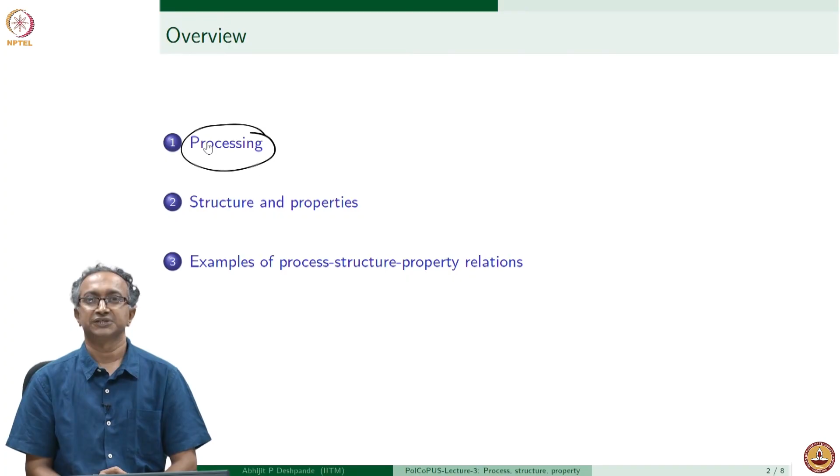The focus in this lecture will be on concepts. We will do this by looking at what is processing in the context of polymers. What do we mean when we say we are processing the polymers? What do we mean by structure of these polymers and properties, and more importantly, how are they interrelated? So we look at some examples of process-structure-property relations in these polymers.

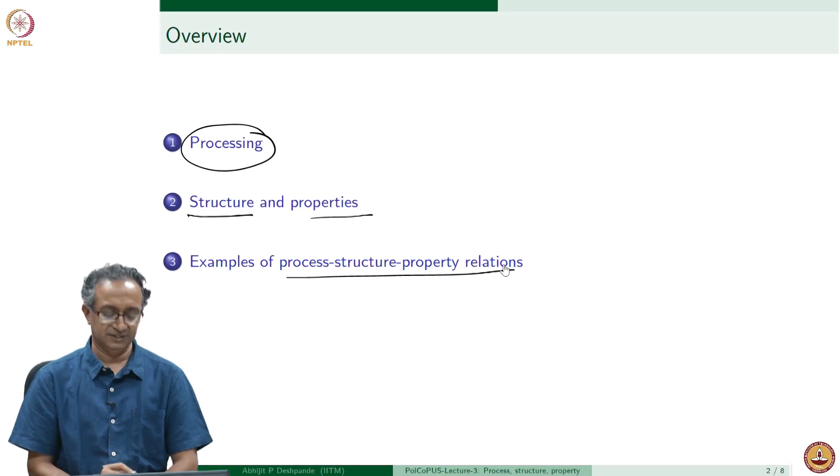Let's first begin by trying to understand what do we mean by polymers and what is the diversity of materials that are actually there when we talk in terms of polymeric materials. We can process the polymer by itself, or we can have the polymer made up of different monomers, when it's called a copolymer. We could mix polymers and make them into a blend. We could also mix the polymer along with another filler, a fiber or a particle, in which case it's called a composite. We could also have a polymer membrane, for example, for water purification.

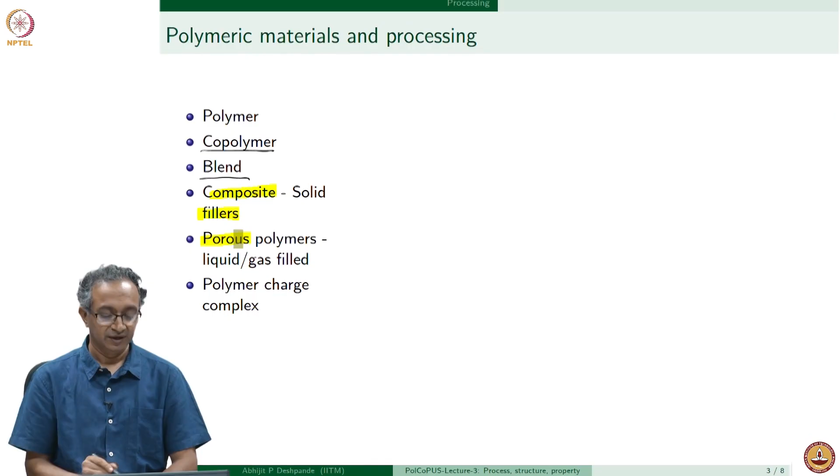We know that many of the RO units which are there in our homes, or whenever we talk of purification of water, membranes are used, and quite often many of these membranes will be porous, in which case they are either filled with liquid or gas. Can you think of an example of a gas-filled polymer? Styrofoam, of course, right? You can see that it's a very light foam material where polymer and gas is together.

And then we could also have a polymer along with some charges, in which case it's a complex of polymer and charge. So when we say polymeric materials, there is a variety of materials, diversity of materials that are out there that have to be considered. Sometimes polymer by itself is there, but quite often it is mixed with other polymers or other sets of substances.

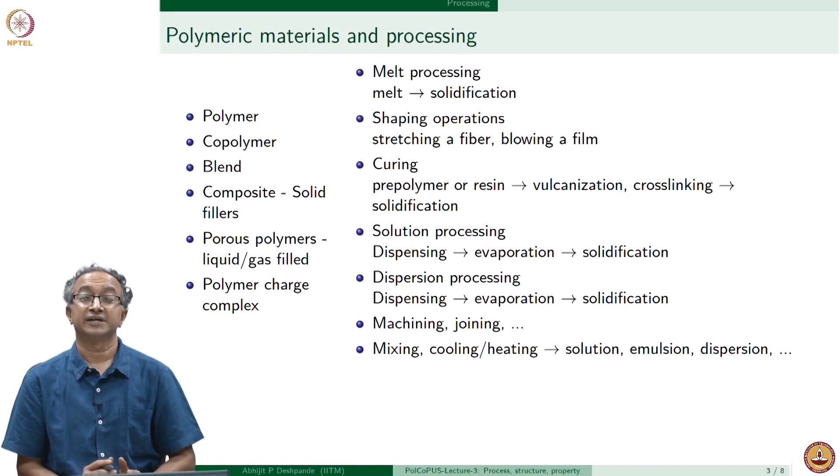So now what do we mean by processing of these polymers? We could have a variety of ways in which polymers can be processed. For example, we can melt the polymers, which means we increase the temperature. So one aspect we can look at is where we can melt the polymers, and by which we mean we increase the temperature, make them more fluid so that they can flow, and then mold them and so on.

So what we have is melt of a polymer and then it will solidify. This is one aspect of processing - that is how a complex shape can be made. If you want to make a disc-like object, initially we start with granules, we melt it and then make it into disc shape by making it flow into a disc shape mold.

Once we get a shape, we might have to manipulate the shape further. For example, we start with granules, we extrude a wire or a fiber, and then we may want to make it thinner. Or we extrude a sheet and we may want to make it into a very thin film. So in that case, we have what are called shaping operations.

An important class of polymers, we start with what is called a pre-polymer or a resin, in which case the polymer is only an oligomer, or small molecular weight, small molar mass molecules. And then when we are actually processing and shaping it, curing happens or reactions happen. So in this case, solidification happens because there is reactions happening in the material.

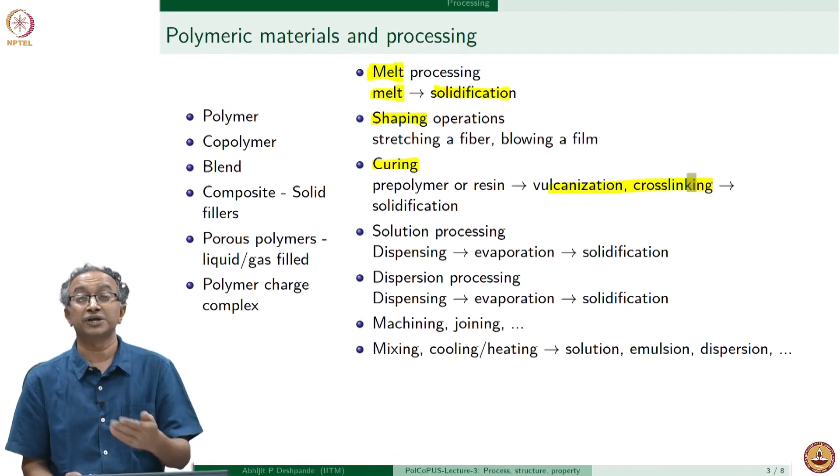There's alternate ways of processing polymers also. For example, if we are using in food applications and we want viscosity to be higher, like a jelly, in that case we may be using what is called solution processing. So quite often, let's say in a coating operation also, we want a polymer coating as a protective coating.

Then we will form a solution and dispense it on the substrate we are coating, then allow the solvent to evaporate, and the solid coating will form. So again, this is an example of a processing operation.

We need not have a solution of polymer where there is intermolecular mixing. We could have just polymer particles, like in case of paint, where we have particles of polymer and particles of pigment, usually an inorganic oxide, in a solvent. This is called dispersion.

When engineering these materials, we may have to cut or shape them, give them a particular shape, join them, welding may have to be done, or fastening may have to be done. So many of these machining operations are also required as part of processing.

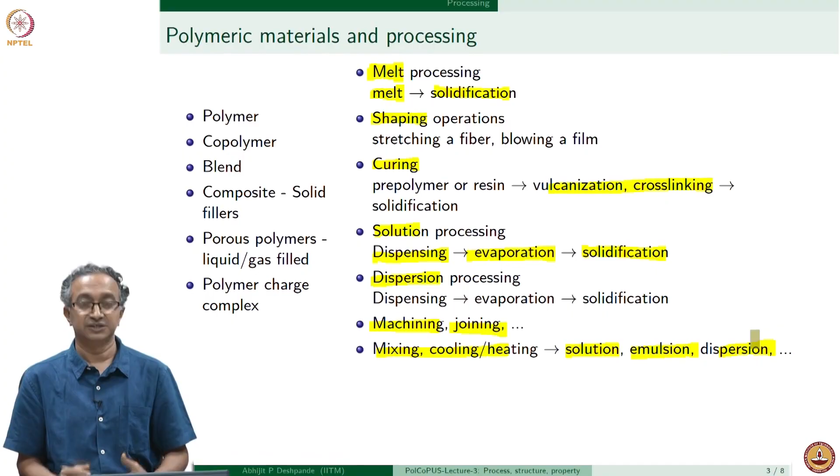Another aspect is that to make solution, emulsion or dispersion, we will have to do mixing, cooling and heating. So when we say we are processing polymers, we are basically trying to fabricate objects out of these polymers, and as part of the fabrication process we have flow, heating, cooling, mixing, and application of stresses and other applied fields, so that we get the requisite shape at the end. This is called processing of polymers.

What about structure and properties? In case of polymers, there are two sets of states which are most important. One important feature to notice is that I am not calling them liquid and solid, I am calling them liquid-like and solid-like.

This is something we will continuously learn during the course: solid polymers will have some liquid-like features, and a melt of a polymer or a solution of a polymer will have some solid-like features. So rather than calling them solid and liquid, we will say they are more solid-like and more liquid-like.

A liquid-like state, which could be a solution or a melt or even a rubber, has many features of liquid-like phenomena, because polymer molecules are dynamic objects in these situations, meaning the polymer molecule can move around. If you think of a bowl of noodles, the noodles are moving around, and that's like a liquid-like state of polymer.

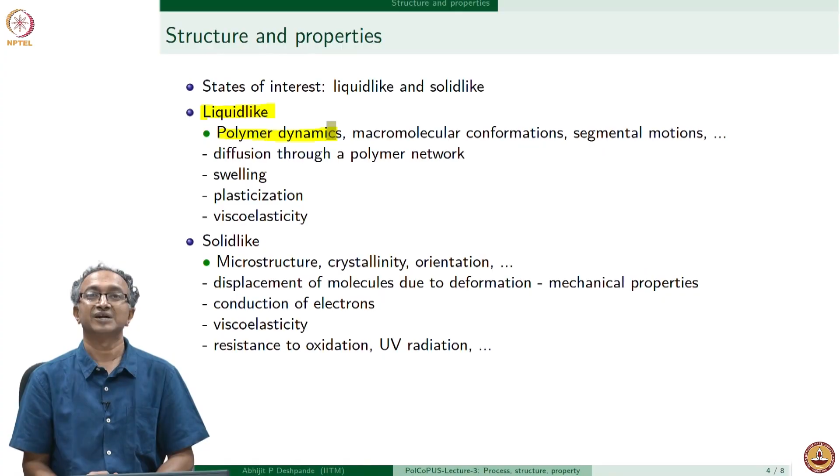So the macromolecules or segments can move about. There is segmental motion possible, or macromolecules can change conformations. And when are these important?

For example, when looking at diffusion of a small molecule through a polymer, how the small molecule diffuses around these macromolecules, which are also moving about, is an important consideration. Or, in a diaper which is supposed to absorb, how much can it absorb, how much can it swell? That is determined based on the dynamics of the polymer, how flexible it is, and so on.

Similarly, when I make an object out of PVC, polyvinyl chloride, I can only make objects out of PVC when I plasticize it. I can add something to plasticize it, or heat something to plasticize it. Whenever I plasticize something, I make segmental motion possible, macromolecular conformations possible. These are liquid-like features which we will have to understand.

Of course, I have already highlighted that when it's liquid-like, it will certainly have some solid-like characteristics also. So viscoelasticity: viscous means liquid-like, elastic means solid-like. The key feature associated with viscoelasticity of polymers will be polymer dynamics, which gives it the liquid-like character.

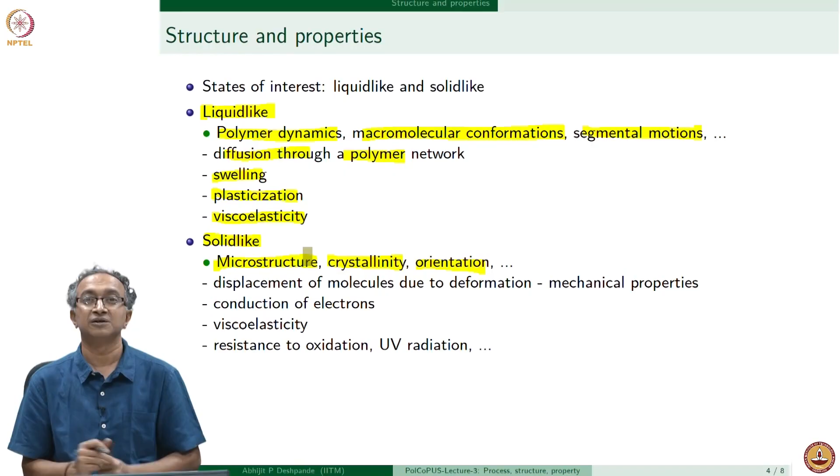On the other hand, if we look at solid-like materials, we need to know whether it's crystalline or amorphous, what is the orientation of macromolecules, how molecules are arranged with respect to each other, or if we have a fiber in a polymer, how the fiber is arranged within the polymer matrix, and so on. This is called the microstructure of the material, and it's also an aspect of structure of these materials.

The properties of interest due to the structure are, for example, the deformation of a polymer material. If it's more crystalline or less crystalline, it will be easier or more difficult to displace molecules. So mechanical properties will depend on the microstructure and how crystalline the material is. Another example is conductivity, and in this course we will also learn about conducting polymers.

Whether crystallinity will enhance conductivity or whether amorphous material will enhance conductivity, we will see structure is again closely linked with property of these materials. In the solid state, though molecules seem to be frozen and therefore we get a solid-like character, there is some liquid-like motion possible over long term or at high temperatures. Therefore solid-like materials will be viscoelastic, meaning predominantly solid-like with lot of elasticity features but with some viscous features also.

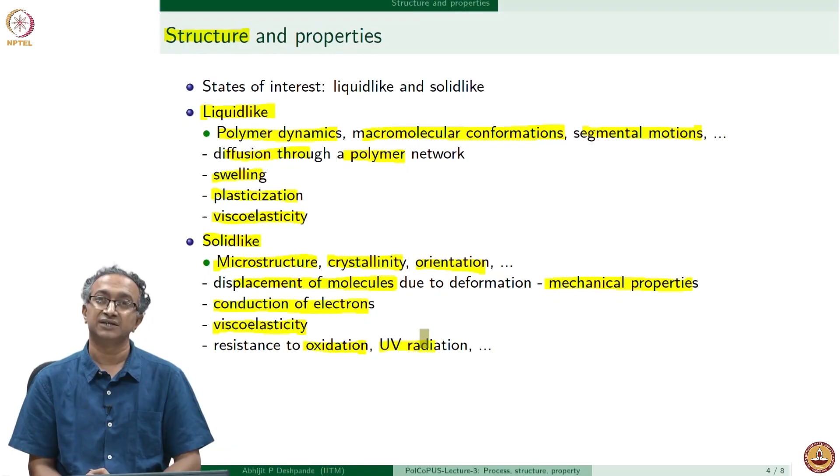And of course in solid state we also have to worry about, for example, can oxygen come in, is it resistant to UV radiation, are chemical reactions happening in the solid state, because this will determine the overall performance of the polymer. So in a nutshell, we have seen what is meant by processing of polymers, what is its structure and what are the properties.

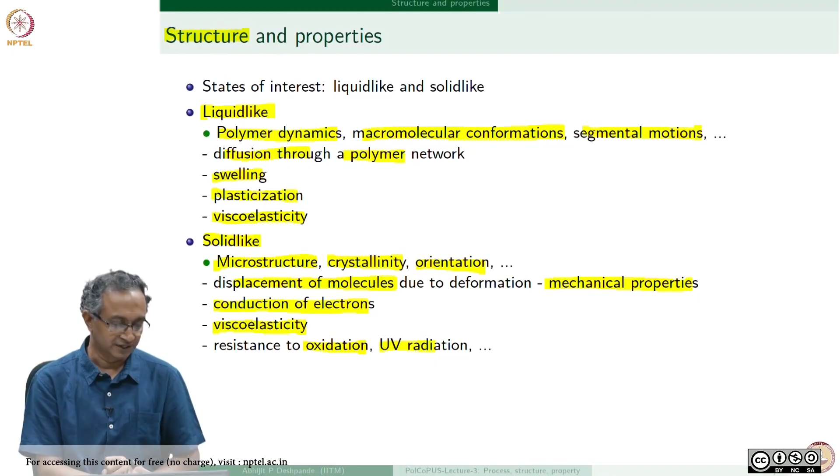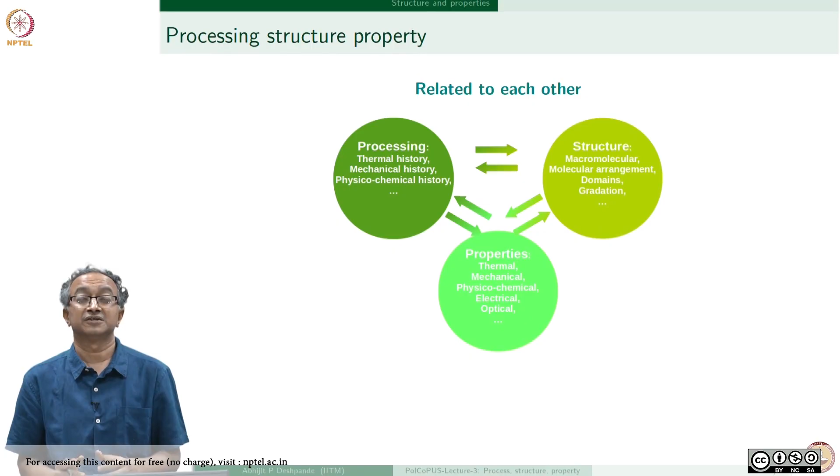Now all of these are interrelated to each other. This is generally called a process structure property triangle of the polymers. This is not unique to polymers, by the way. Most material scientists would talk of process structure property relations in materials, because the way you process them will determine their structure and properties, or depending on the structure, processing and properties will be determined, or properties will determine what process and what structure do they have. So it's basically interrelations between all of these.

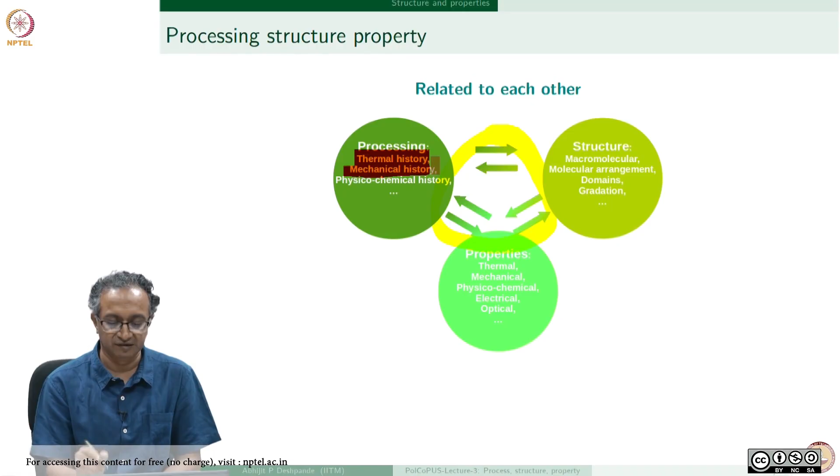When we say processing, we talk about what was it heated to, what was it cooled to, what was the thermal history of the material. When we talk about processing, because we stretch the material, we make it flow, and when we process it, it could be along with a plasticizer, it could be along with a solvent. So there is always a physico-chemical, mechanical and thermal history associated with processing, and two different processing operations will lead to two different sets of structures and therefore different sets of properties.

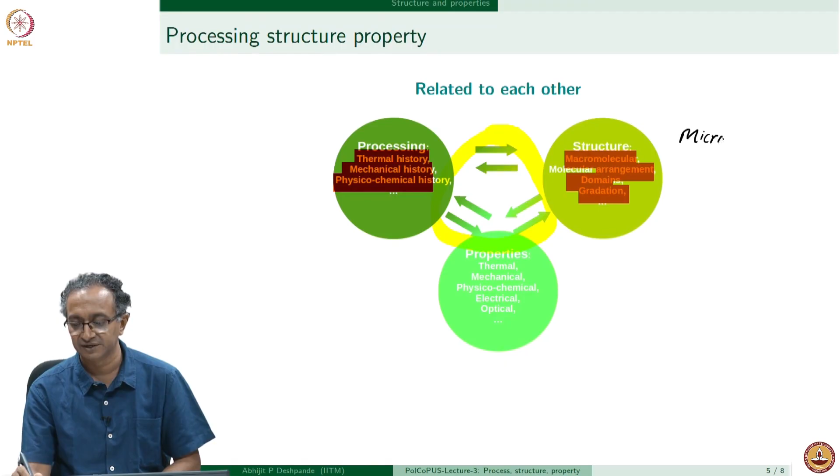When we say structure, we look at the molecular structure in terms of arrangement of molecules, in terms of domains, whether it's crystalline domain or amorphous domain, or maybe one particular polymer mixed in another polymer, and also whether there is gradation in terms of compositional difference. One part of the component may have lot more fiber compared to the other part, so there is a gradation in terms of structure. One part of a component may be more crystalline compared to the other part. That's why it's called microstructure - we many times refer to not just structure but microstructure, because we are interested in microscopic details of the structure.

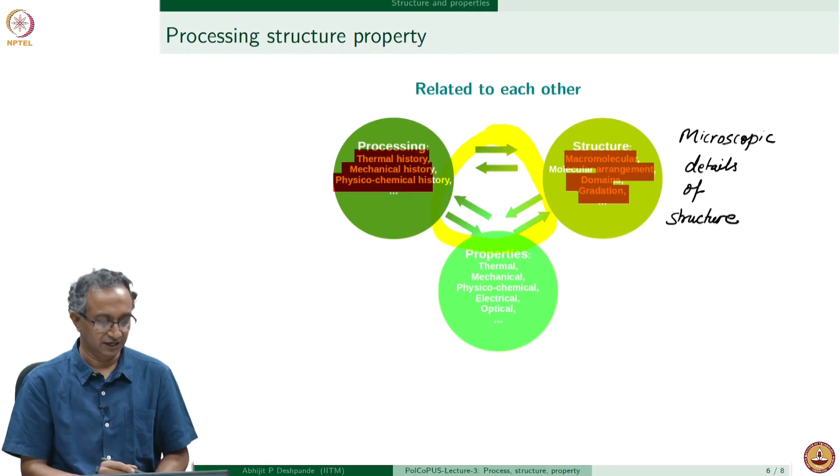And when we think of properties, we think of all different properties: thermal conductivity, mechanical modulus of the material, conductivity, refractive index, and so on. So in the beginning, we looked at what is meant by process structure properties. Now we will close this lecture by looking at a few examples of each of these as to how processing, structure, and property are related in case of polymeric materials. So let's start with processing and structure relationships.

The first example that I'm going to give is biaxially oriented polypropylene, BOPP. If you search this term, you will see that lots of suppliers are there in each and every country which supply BOPP films, and it's different compared to polypropylene. The reason is that this film is processed in a particular way. What we mean by biaxial stretching is, if I get a film, I stretch it in two perpendicular directions.

And how is this different compared to, let's say, HDPE, where you have a largely linear polymer with very small branches at most, entangled with other sets of macromolecules. You can clearly see that how a molecule can move about will be very different, because entanglement and these branch points will make very different motion in branched polymers as opposed to linear polymers.

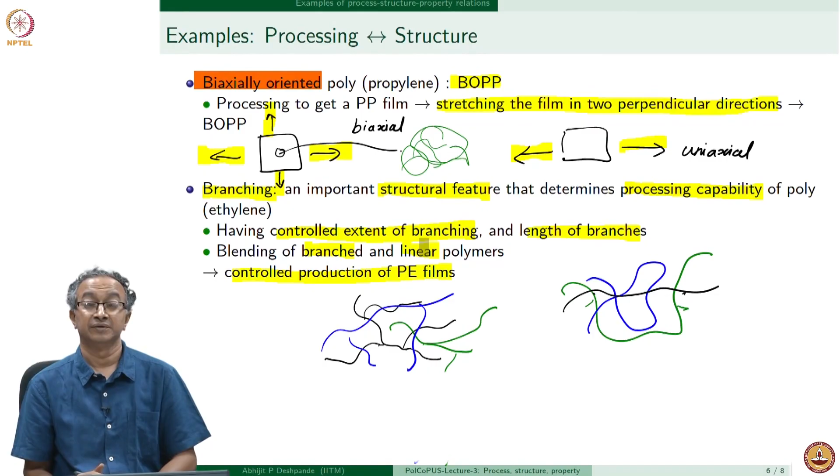And so, for a controlled production of polyethylene films, many times blending of branched and linear polymer is done. This is such a popular case of improving processing of materials that polylactic acid, which we will learn, is

a very promising biodegradable polymer for many packaging applications. But it's very difficult to process polylactic acid. So one of the key research and practical questions people are asking is, can we use branching to improve polylactic acid processing? Polylactic acid generally will be a linear molecule, so can I make it branched? Or can I mix some other branched molecule into it so that I can make film very easily, like I can make films with polyethylene?

Another aspect that we will continue to learn throughout this course is related to polylactic acid: in which way is it biodegradable? What makes polylactic acid biodegradable and polyethylene not biodegradable? Also, why is polylactic acid important? Because we are using a renewable resource with it. So in the next set of lectures during the course, we will also learn about these aspects.

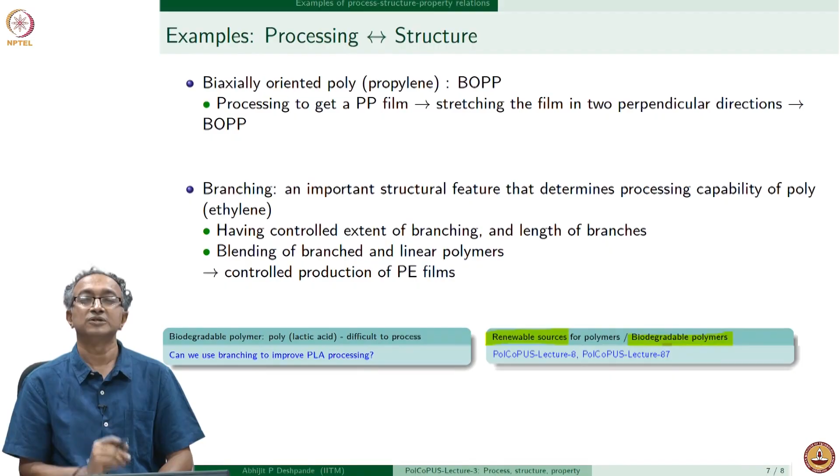Now let's continue and look at other examples of processing and property. For example, when we are doing welding, molding of plastic objects, we will have flow. So when we do plastic molding, there will be flow and melt flows. For example, if we are making a cylinder with a hole in it, basically an annular kind of object.

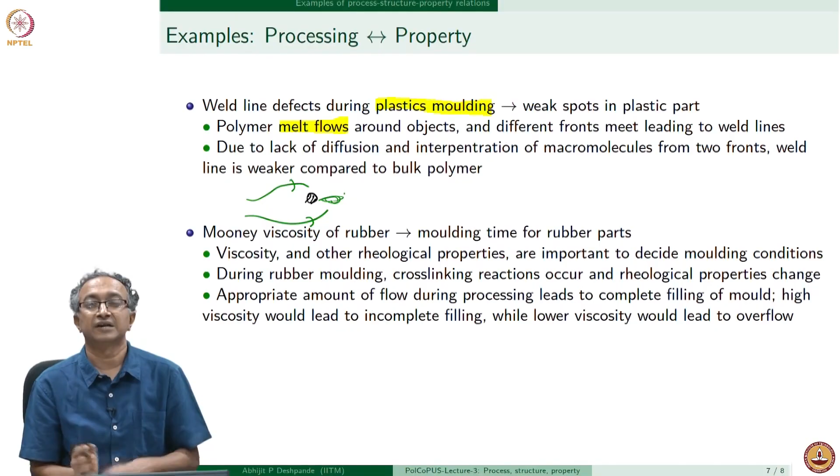What will happen is we will have a solid block around which polymer will flow. So polymer melt will flow like this, it will flow like this. And the polymer in this region, the polymer melt will come and flow and again join together. That's called a weld line of a mold. So the weld line is going to be the weak spot, because two polymer melt fronts have to come and meet, and then macromolecules have to start entangling.

But depending on the diffusion rate and depending on the temperature and pressure of our molding operation, this interpenetration may not be sufficient. So in the end, when we get a plastic object, everywhere else the properties will be very strong, but here, since the polymers haven't got enough chance to intermingle and interpenetrate, there will be a weak spot. So this is a case where processing is leading to a property issue in terms of weak spots.

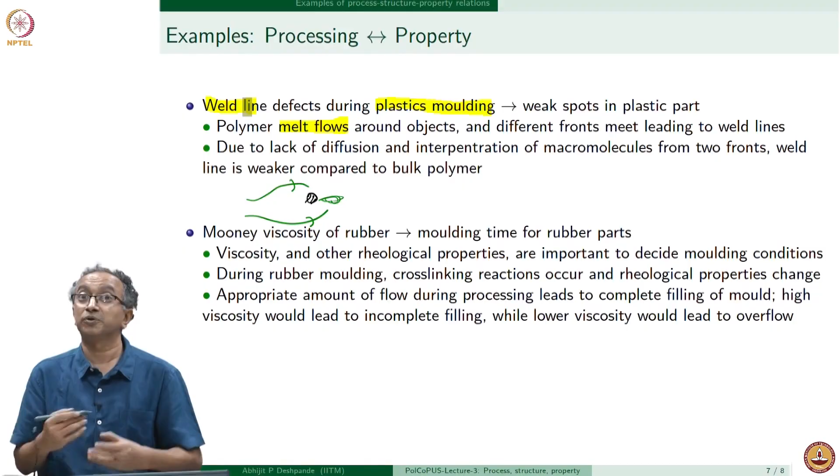And that's where the part is likely to fail. So we need to know where the weld lines are, and can we reduce the disadvantages of weld lines, can we improve properties around weld lines? So processing directly influences the performance of a part.

We can also look at another example where Mooney viscosity of rubber is important in terms of finding out how we will process it. For example, how much time will the molding operation take?

Because starting viscosity will determine how the material is flowing and being shaped inside a mold. And more importantly, in case of rubber, as the molding is going on, cross-linking happens and viscosity changes as a function of time. Rheological properties, which are nothing but flow behavior properties of rubber, keep on changing.

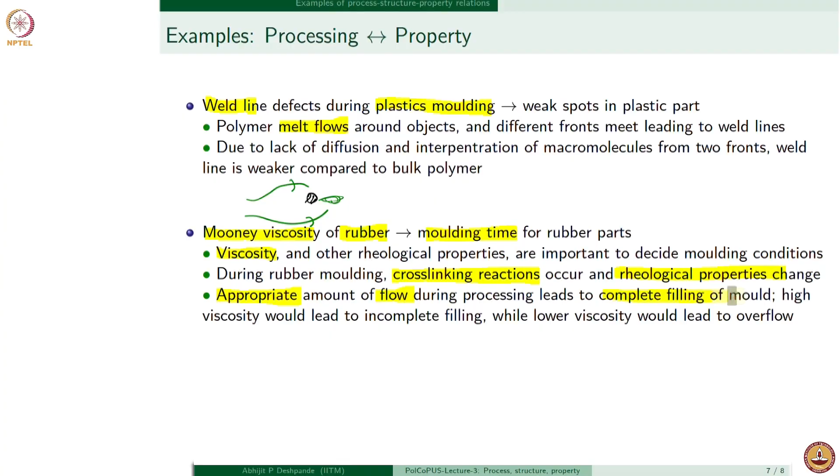So we have to ensure appropriate amount of flow during processing so that we have complete filling of the mold, which implies we should not have incomplete filling, or too much overflow. This can be ensured if we understand the viscosity of the material properly. So in this case, the property of the material influences the processing conditions.

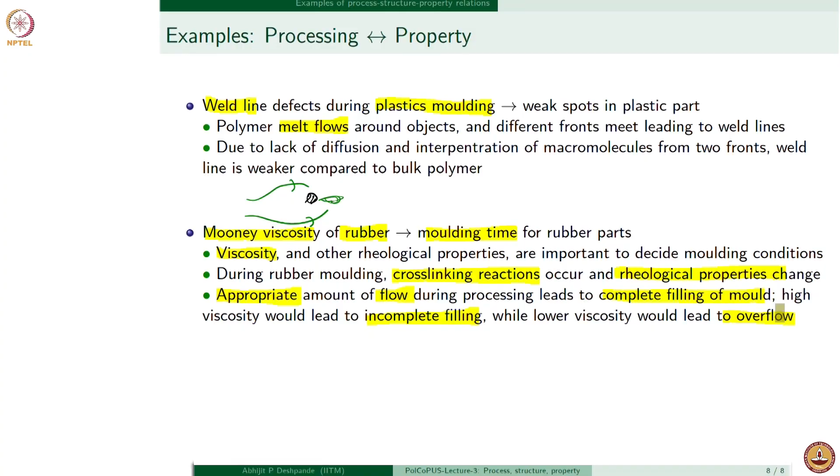So it's a very complex material, and the conductivity depends very strongly on the structure of the material, and in fact the microscopic arrangement in the material. How is the crystalline arrangement of PEDOT, which is one polymer of this overall polymeric material, and how are the domains of PEDOT and PSS distributed with respect to each other?

So you can see how the structure of the material determines its property, in this case electrical conductivity. This gives a very rich possibility from an application, scientist, and engineer point of view. Can I manipulate my structure in a way to give maximum property? So I need to understand the relation between the microstructure and the property, in this case electrical conductivity.

The last example we will look at is where a property, in this case glass transition temperature, influences the structure, in this case molecular rearrangements in the material. So a polymeric material, let's say a PET bottle, if we keep it at room temperature for 25 years, at room temperature meaning around 25, 30, 35 degrees Celsius, it will be fine.

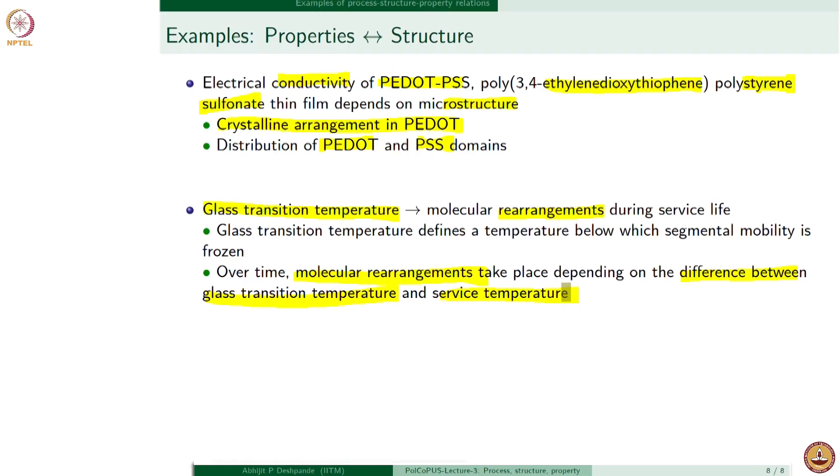So through this, we have seen the possibility of important correlations between processing, structure, and properties in these polymeric materials. Just to remind you, conducting polymers we will look at in a separate lecture, where we will see if it is possible to get conductivity. Rather than adding a conducting material into it, can I have a polymer which is intrinsically conducting? Sure enough, we'll see that later.

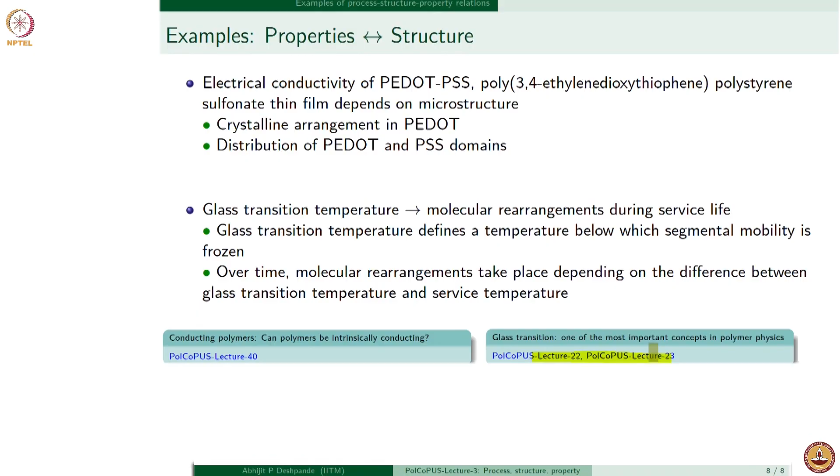And of course, glass transition is a very important property in polymers, and we will devote a couple of lectures discussing it in much more detail. So with this, we have come to the end of the first 3 sets of lectures, in which we tried to understand some basic nomenclature associated with polymeric materials. Thank you.